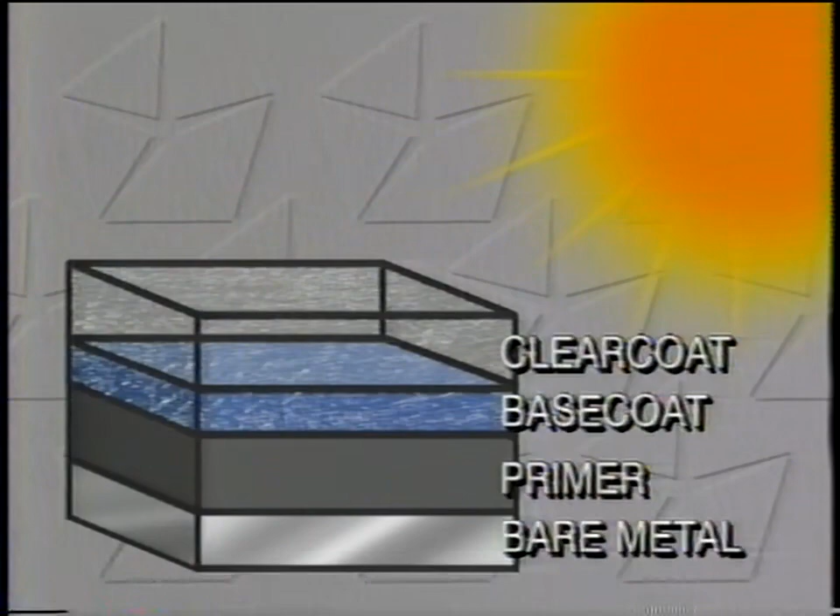One type of defect is paint delamination. Paint delamination is caused by the sun's ultraviolet rays penetrating through the finish, causing the clear coat or base coat to flake, or sometimes peel away from the primer undercoat. This video demonstrates how to identify the extent of the damage and determine the proper repair procedure.

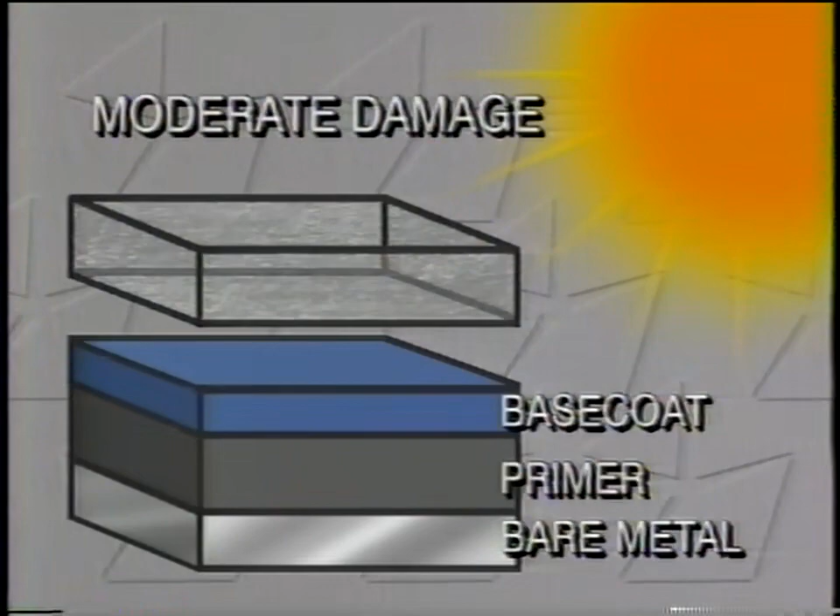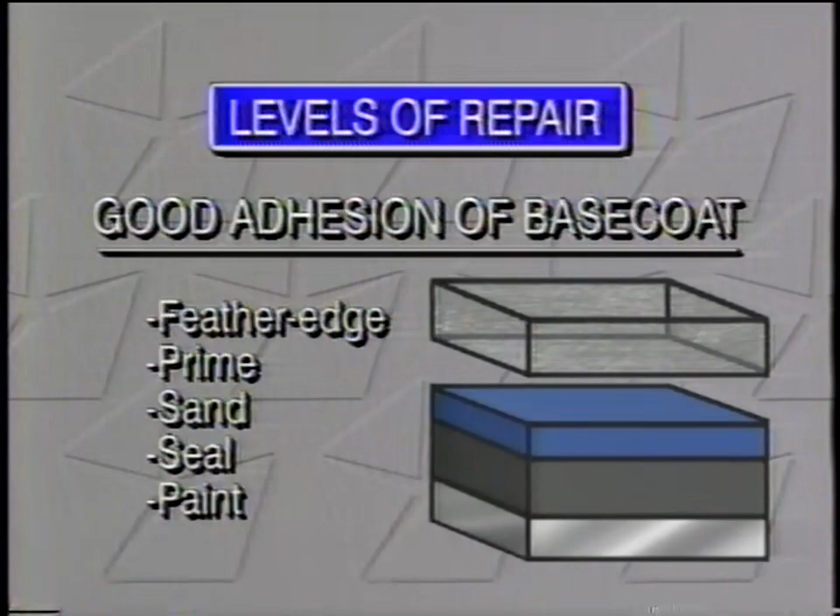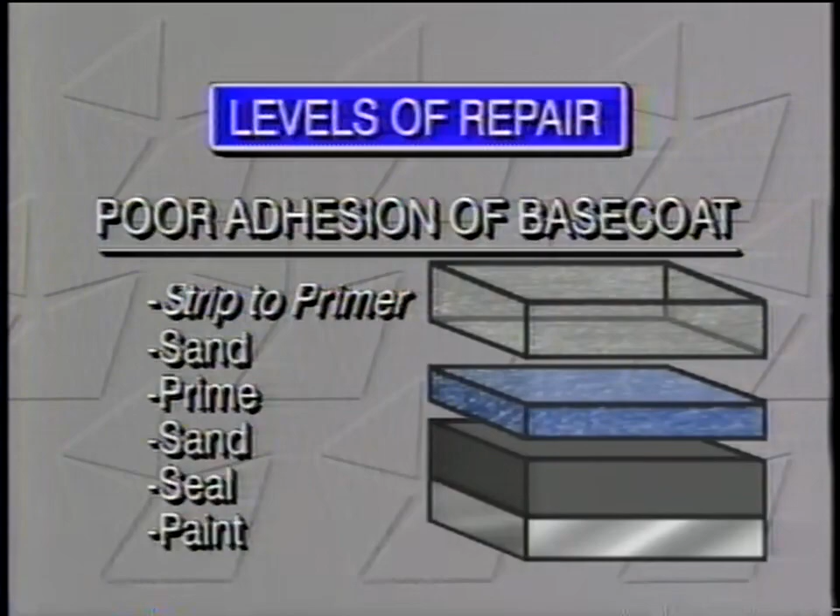Basically, there are two levels of repair procedures depending on how the base coat clear coat is adhering to the factory primer or E-coat. In cases where adhesion of the base coat is good, the repair area can be feather-edged with an orbital sander, primed, sanded, sealed, and repainted. In cases of poor adhesion, where both the clear coat and base coat are peeling away from the undercoat, it will require stripping of the clear coat and base coat down to the primer.

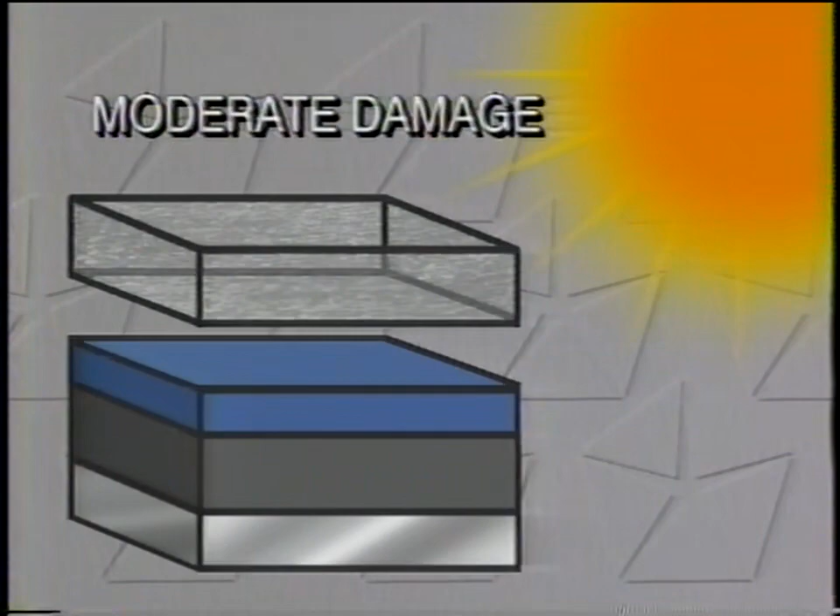So the first step of the repair procedure is to perform an adhesion test, both on the visibly affected areas and on panels not yet showing any delamination. This will determine the severity of the delamination and how much of the vehicle needs to be refinished. Follow these steps. Wash the vehicle with soap and water. Rinse. Then clean the affected panels with a wax and grease remover, such as PPG's DX330, or DX380 in areas where VOC regulations are in effect.

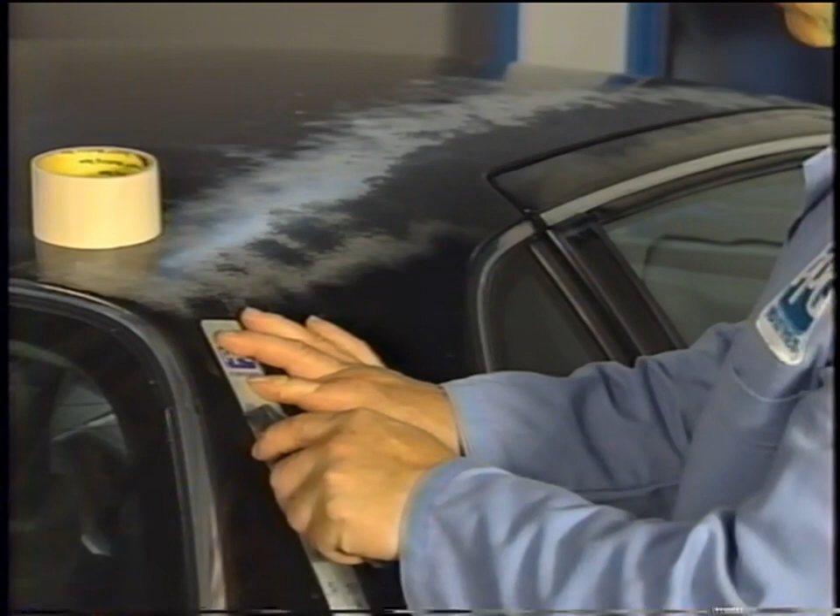Check adhesion using the cross-hatch adhesion test. Using a steel rule or scale as a guide, hold a razor blade at a straight vertical angle and score the paint film down to the metal. Make 4 or 5 cuts, each approximately 1/8 inch apart. Then, like in tic-tac-toe, make another 4 to 5 cuts in the opposite direction, across the first cuts.

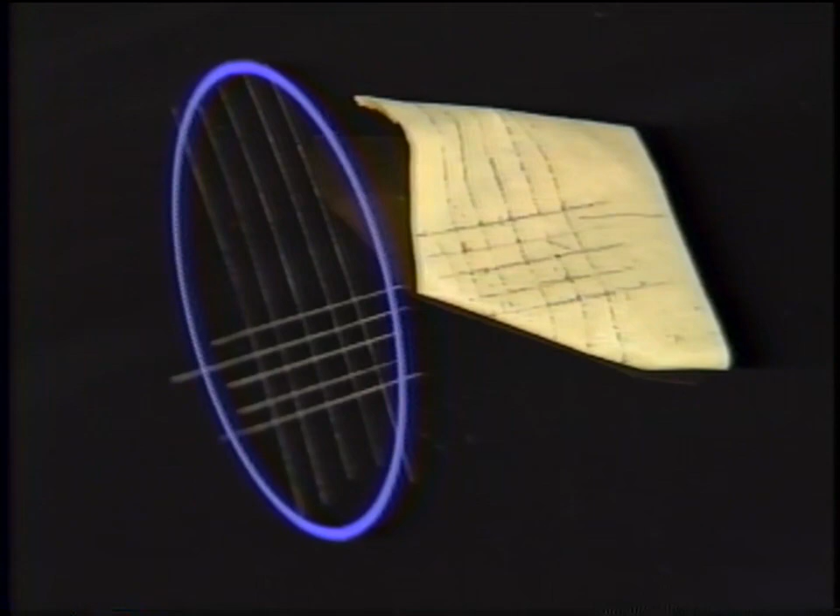Now place a piece of 2-inch masking tape over the cross-hatched area. Press the tape down firmly to make sure the tape adheres. Then pull the masking tape away quickly. Take a look at the cross-hatched finish and the tape. If only clear coat has been removed, it will appear as a clear film on the tape. If none of the base coat color was removed by the tape, no stripping will be required. You can proceed to feather edge, prime, sand, seal, and repaint.

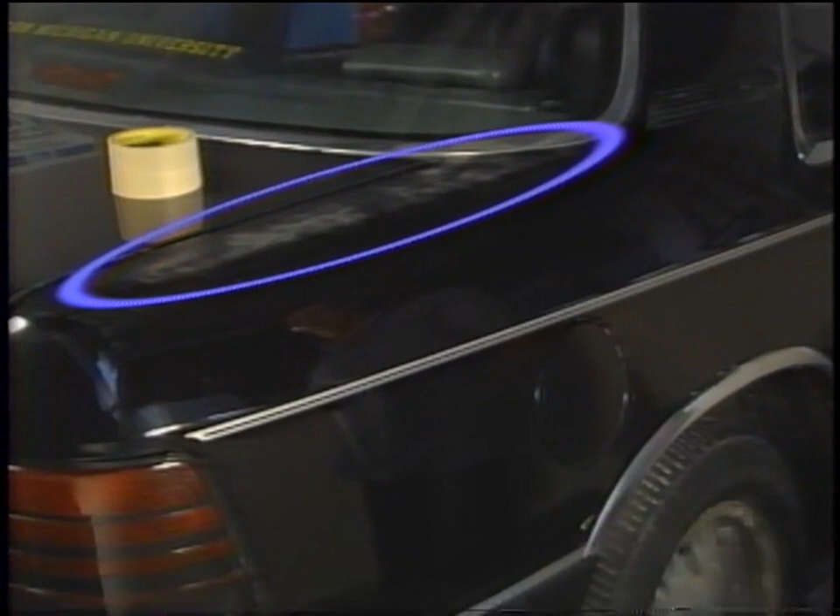If no damage is visible on a vertical surface, yet a horizontal surface like the hood or roof reveals poor adhesion, you still should perform an adhesion test on a vertical panel, just to be sure. It's a good idea to perform an adhesion test high enough on the vertical panel so that if it shows good adhesion, you can repair the test area while you repair the horizontal panels. Make sure to perform more than one adhesion test on the affected panel and on adjacent panels not showing the condition.

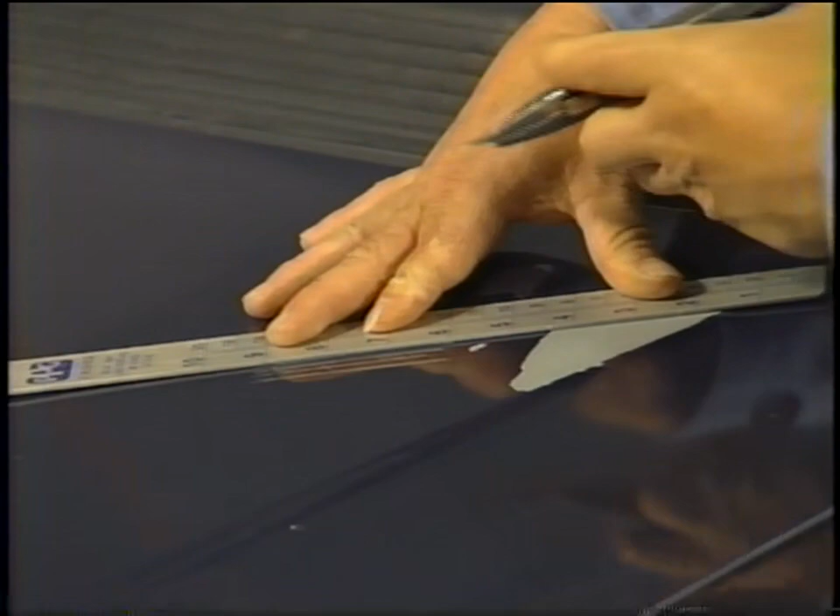Occasionally, the crosshatch test will reveal poor adhesion of the base coat. In this example, we can see that the adhesive tape removed both the base coat and clear coat from the center of the squares, exposing the primer. Therefore, adhesion is poor and stripping will be required. If an adhesion test reveals poor adhesion on a vertical panel surface, it will require stripping to the primer and repainting the entire vehicle or down to the nearest break point.

Now let's take a look at how to repair paint delamination. Your first concern should be safety, so always read the safety precautions on the MSDS sheets and product labels. And always wear the proper protective clothing and the appropriate respiratory protection when working with refinish materials.

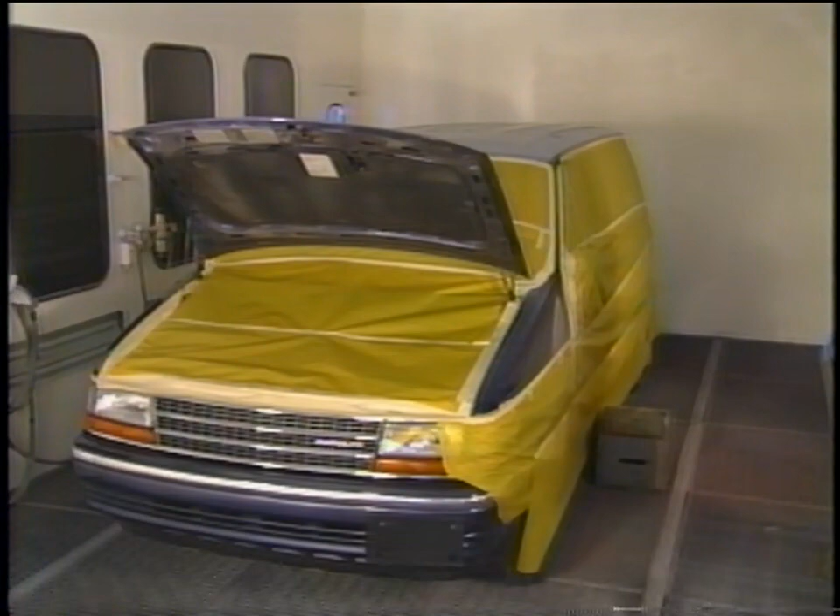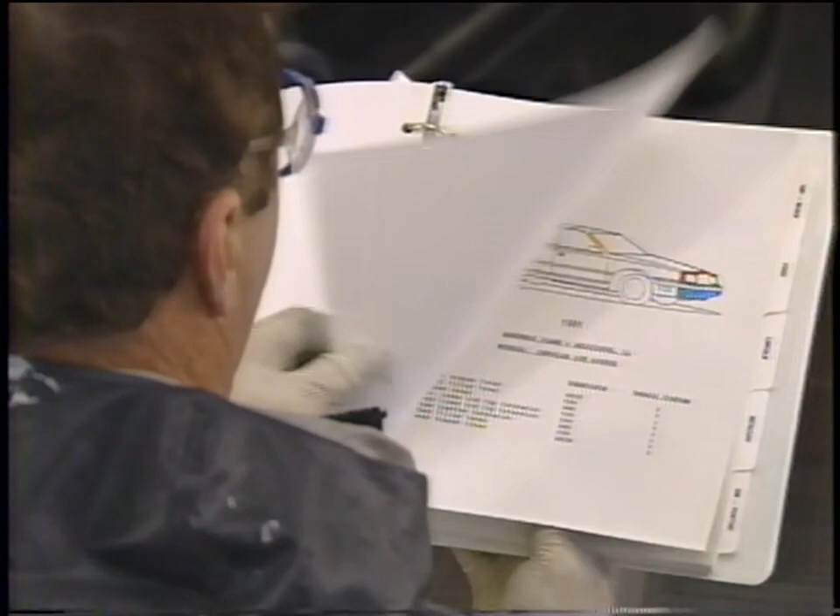Let's look at making a repair when a vehicle's finish has poor adhesion and the base coat is peeling away from the primer. This situation requires stripping affected panels down to the primer. A word of caution: many new Chrysler vehicles have plastic or composite substrates, so be sure to identify the substrate on the panel you're working with before repairing the finish. One way of identifying the substrate is to refer to PPG's Plastic Identification and Refinishing Manual, available through your local PPG distributor.

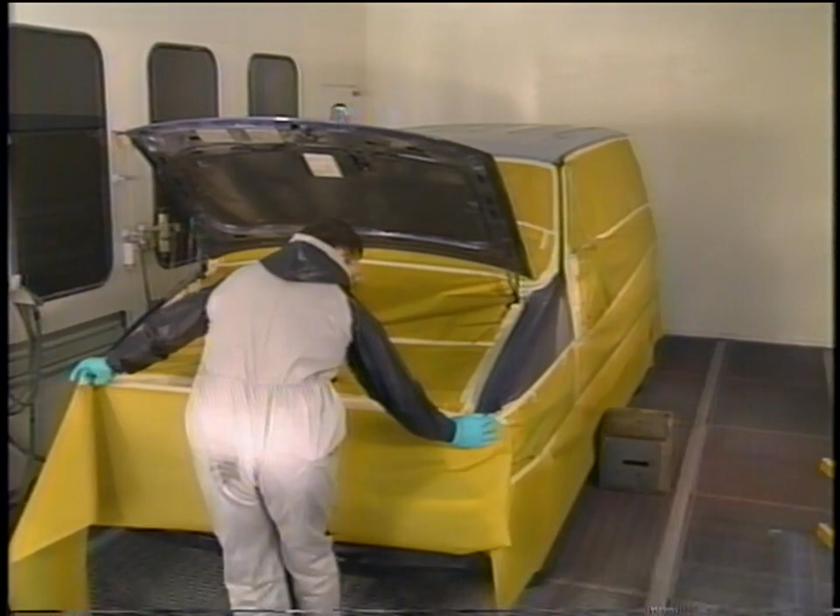The first step is protecting all necessary hardware, molding, and trim, and mask off all other areas. Then remove both the base coat and clear coat on all affected panels. The finish can be removed either by DA sanding using 80 to 120 grit paper, carefully using a razor blade, or by the plastic media blasting method.

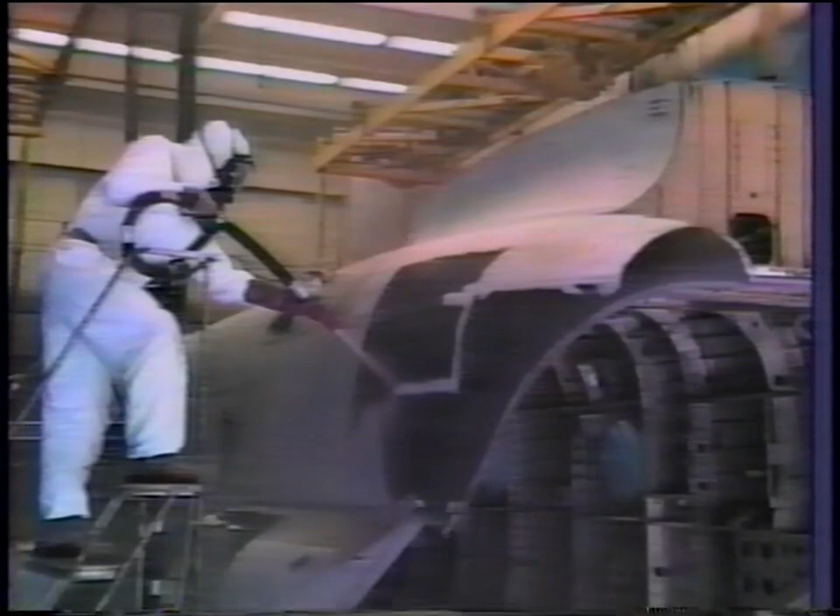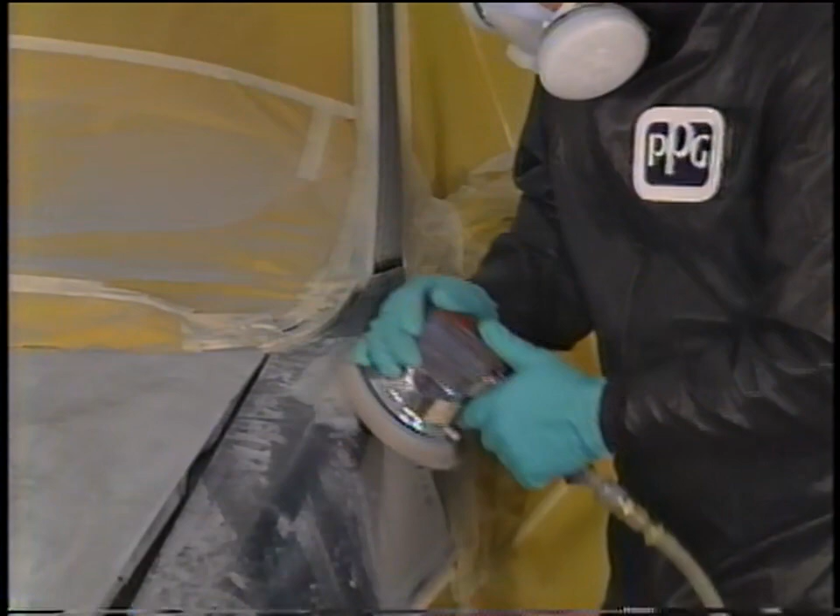Also prepare the finish on any upper vertical panels where an adhesion test was performed. This vehicle demonstrates good adhesion on the vertical surfaces, therefore stripping is not required. Do not use a liquid chemical stripper, because you want to maintain as much of the original primer as possible. Blow off and re-clean with wax and grease remover.

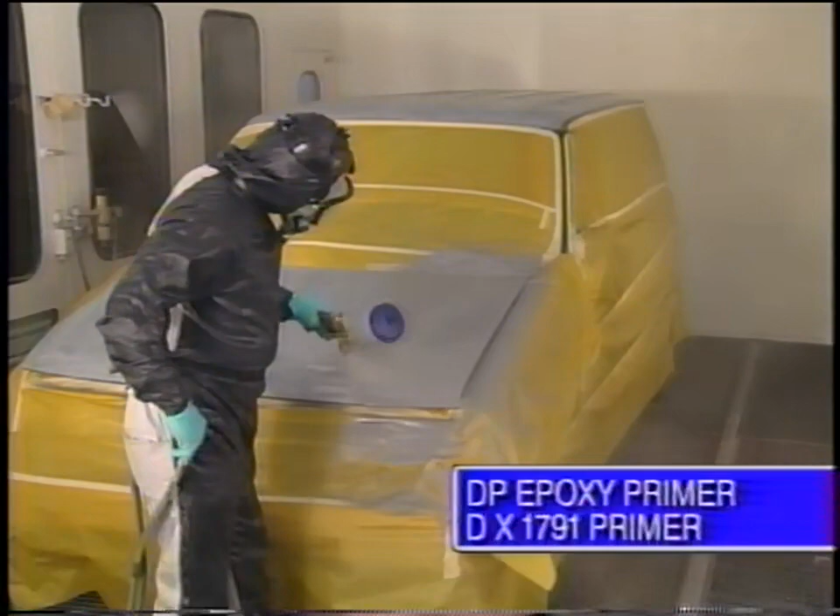Now you want to seal all stripped areas with one coat of an anti-corrosion primer, such as PPG's DP Epoxy Primer or DX1791 Self-Etching Primer. Remember, always prepare the adjacent panels for blending to ensure a good color match.

If filling is required to level the surface, apply 2 to 3 coats of a 2-component primer surfacer, such as PPG's K36 primer. Use DCP21 in low VOC regulated areas. Make sure to guide coat all primed areas using a contrasting color material.

After the primer surfacer has dried properly, sand all areas that have been primed using 400 grit paper, followed by 600 grit. Blow off and re-clean with wax and grease remover. Then apply one coat of a 2-component sealer, such as PPG's NCS 247, 230, or DP primer. Now you're ready for the base coat.

To help assure good color match, make sure to take advantage of any color matching tools available from the paint manufacturer, such as PPG's Color Variance decks, which offer alternate paint formula choices for vehicles with finishes that vary from the OEM color standards. Or PPG's Profit computerized color analyzer, which can read the actual color of the vehicle and adjust a paint formula to achieve a blendable match. It's available through participating PPG distributors.

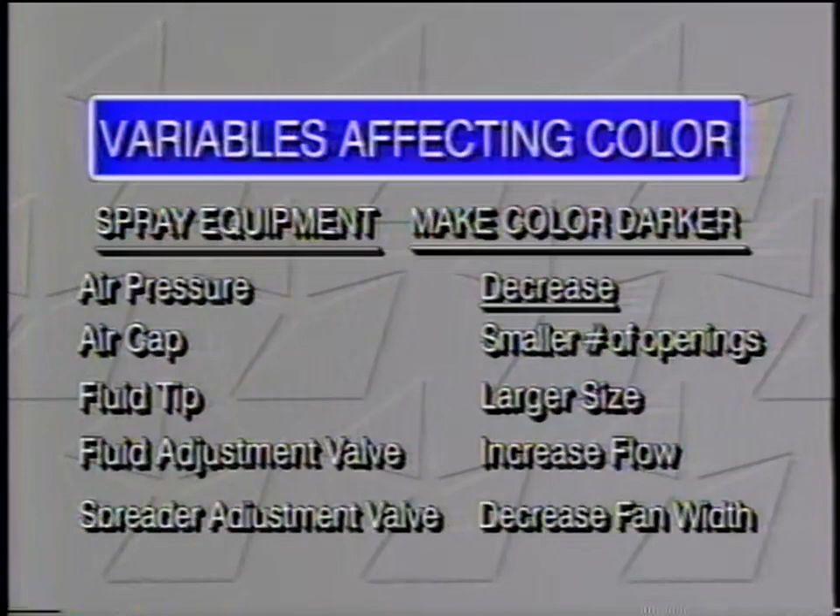The type and amount of the reducer you're using can also affect the color match. To make a color lighter, use a faster evaporating reducer, or increase the volume. Do the opposite to darken the color. You can also adjust your spray technique. To make a color lighter, you can increase the distance of the gun, or the gun's speed. For a darker color, decrease the gun's distance and/or speed.

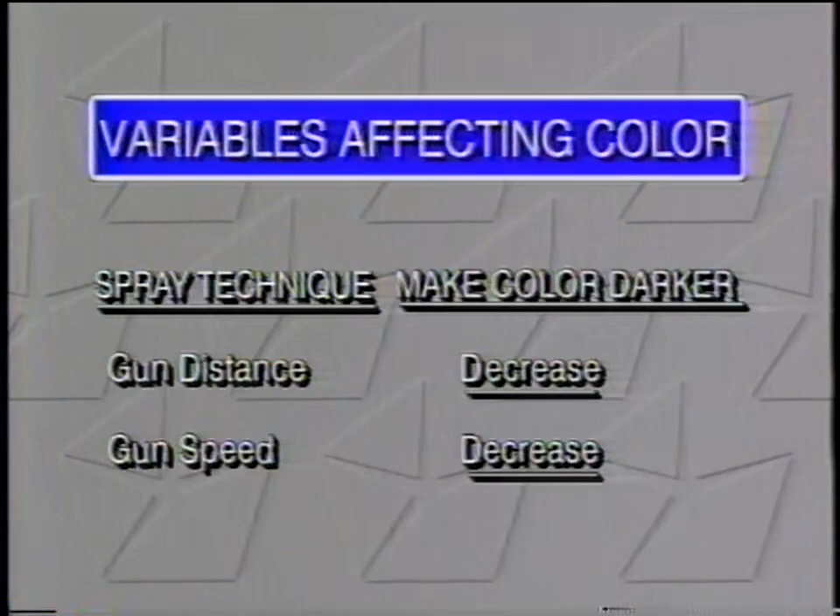After checking color match with test panels, apply 2 to 3 coats of the base coat color, such as PPG's Deltron DBU or DBC. Once hiding is achieved, let the base coat dry properly, and you're ready for the clear coat. Apply 2 to 3 coats of a 2-component urethane clear coat, such as PPG's DCU 2020 or DCU 2001. Allow the finish to dry properly. Then, finesse polish if necessary before delivery to the customer.

That's how you perform a repair when a vehicle's finish has poor adhesion and the base coat is peeling away from the primer. Now let's look at the repair procedure for cases where only the clear coat shows delamination. Remember, this type of repair will not require stripping. The first step is protecting all necessary hardware, molding, and trim, and mask off all other areas.

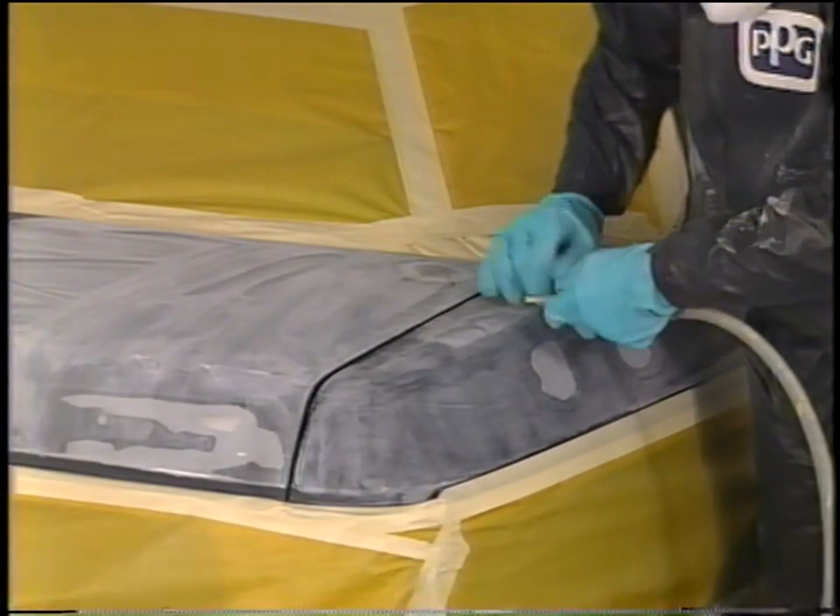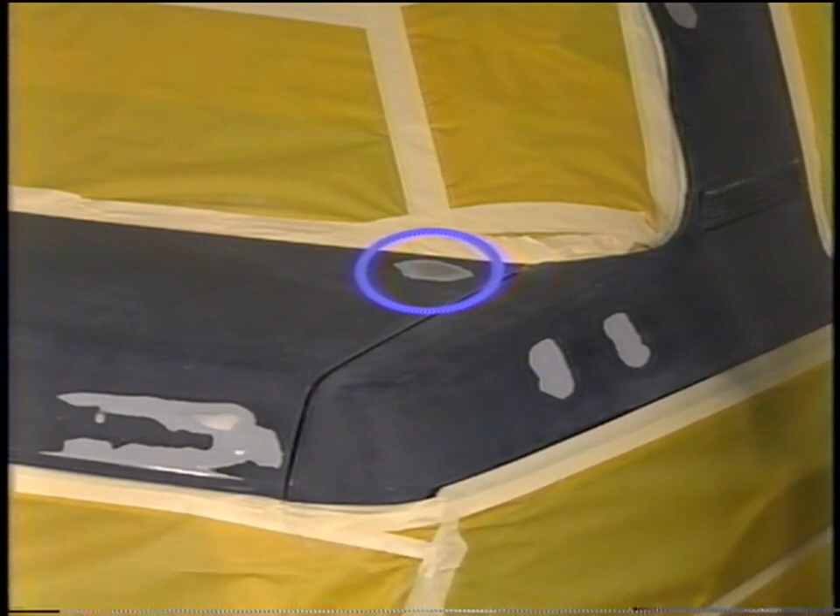Sand and feather edge the affected area using a DA sander and 240 to 320 grit paper, followed by 400 to 600 grit. Blow off the residue with compressed air. Then re-clean with wax and grease remover. If bare metal is exposed, apply one coat of an anti-corrosion primer, such as PPG's DP Epoxy Primer or DX1791 Self-Etching Primer. DCP-21 may be used for low VOC regulated areas.

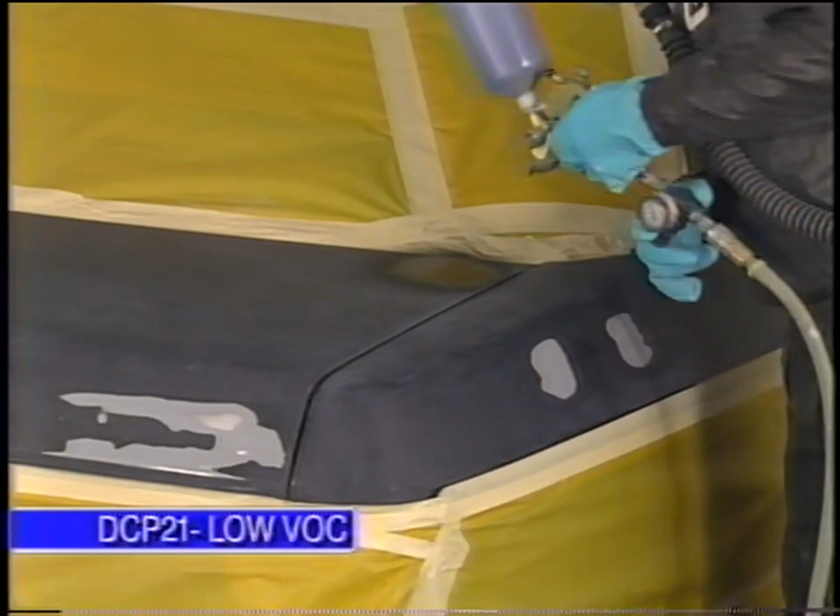If filling is required to level the surface, apply 2 to 3 coats of a 2-component primer surfacer, such as PPG's K36 primer, or additional coats of DCP-21 for low VOC regulated areas. Make sure to guide coat all primed areas using a contrasting color material. After the primer surfacer has dried properly, sand all areas that have been primed using 400 grit paper, followed by 600 grit. If sanding by machine, be careful to keep the sanding pad level with the surface.

Blow off with compressed air and re-clean with wax and grease remover. Then tack off the repair area. Next, apply one coat of a 2-component sealer, such as PPG's NCS 247, 230, or DP primer. You're now ready for the base coat. Once you're sure of a color match, apply 2 to 3 coats of the base coat color, such as PPG's Deltron DBU or DBC. Once hiding is achieved, let the base coat dry properly, and you're ready for the clear coat.

Apply 2 to 3 coats of a 2-component urethane clear coat, such as PPG's DCU 2020 or DCU 2001. Allow the clear coat to air dry properly, and finesse polish if necessary before delivery to the customer. That's how you perform a clear coat delamination repair where adhesion of the base coat is good. By taking care to follow these procedures correctly, you can help assure that Chrysler Corporation vehicles maintain their high level of customer satisfaction.